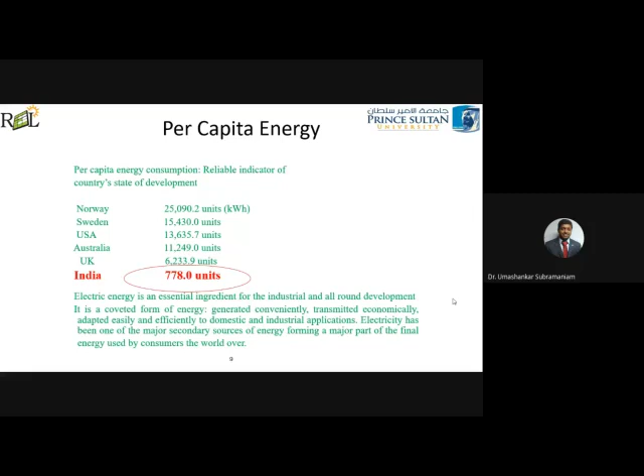Even recently one more incident happened, maybe in June or July. So the TNEB or any other energy industry, or the government, should be very, very alert to manage energy demands, especially to deliver energy without interruption to the entire community. So energy is more than an expense, it can be a liability.

What does it mean is the power cuts, you know very well. In India, just for maybe 5 minutes or a particular time period, we switch off, you know very well, during the corona, as well as there is one day we celebrate worldwide, a zero energy day like that. On that day also, they advise us to switch off all the things. If we do that, what happens? That is fine, maybe for a short time. So you just imagine about the power cuts.

Recently there was a cyclone in the USA, you know very well. The entire city was in dark, almost 24 hours, more than 24 hours. If this is the case, and another thing is in the Middle East countries, you know very well, there the temperature is quite high.

For example, we are facing here almost 40 to 50 degree temperature every day. This month only it started decreasing, but still it is 42 degree here. So this is the scenario. Most of the Middle East countries face like this.

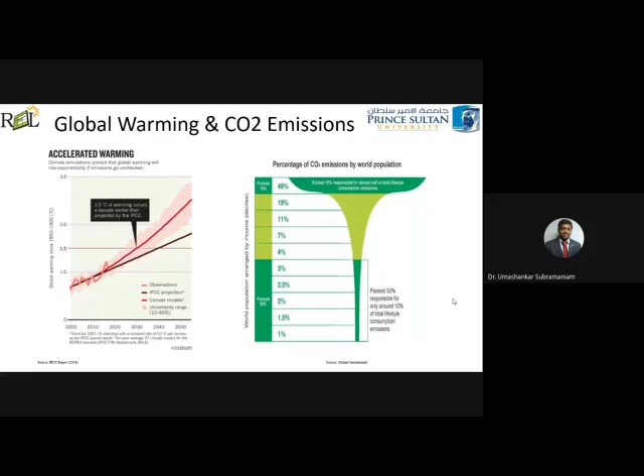Percentage of CO2 emission, if you look at the richest country as well as the poorest country, it is less - only the emissions are very less. For example, 3% in the poorest country. When you look at the developed, richest countries, the CO2 emission is huge.

So what are we supposed to do? As per the Schneider Electric formula, the world in the next 40 years would require far more energy, but in an ever more sustainable way - meaning how you can consume it using natural resources with more energy efficiency. In the next 40 years, what they predicted is energy consumption will be doubled, CO2 emission needs to be half, otherwise we will be in danger. For that, we should become 4 times more energy efficient.

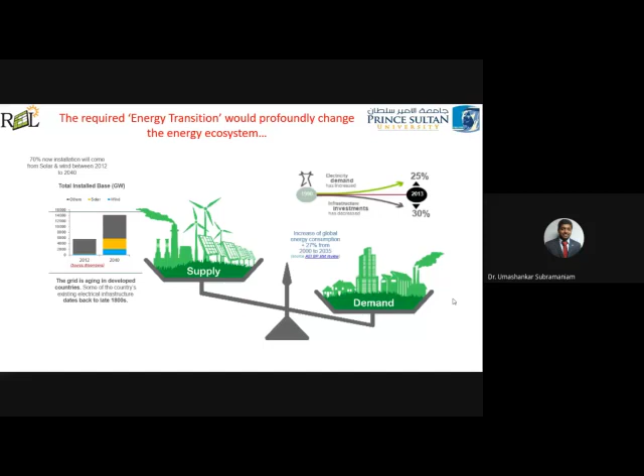Then the second thing is green building. Nowadays we need to focus on green building because it is part of the smart grid as well as smart cities. The building is a citizen of the city and has an obligation to society, so it should provide very good economic and environmental performance.

Who's that? Anita ma'am, can you mute? Excuse me, can you please mute that? One minute sir. Prasanna, unmute your mic. Prasanna sir, excuse me. Thank you sir. Sorry for the disturbance.

Anyway, this kind of entertainment in between is nice, only to alert the audience. So what we need to consider is the unique cultural needs, health, safety and productivity of its occupants, and with continuous care, the building has to minimize energy use.

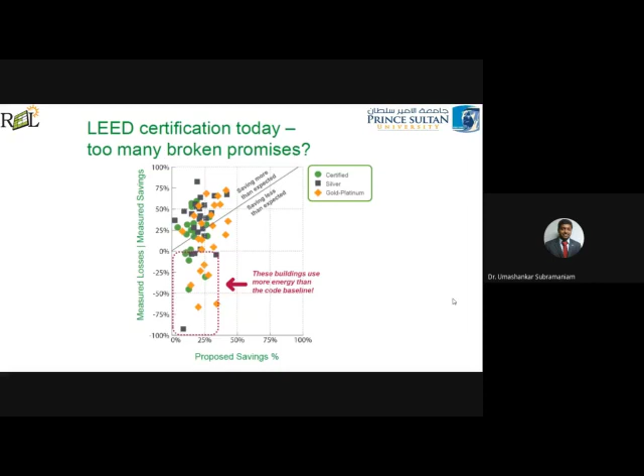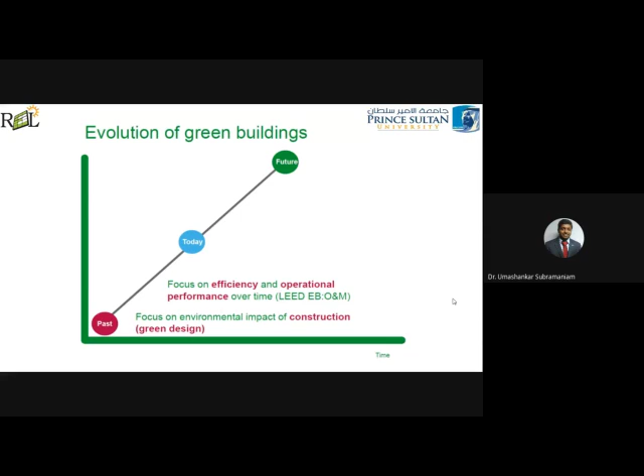Later on they implemented a star rating for different electrical equipment. You might be knowing about ACs, refrigerators, washing machines, all electronic equipment. Now they are giving a star rating stating that the energy consumption is very less.

So what is the advantage of going with equipment whose energy consumption is very less? You know very well, right? Recently during COVID-19, especially in the Chennai region, TNEB implemented a scheme saying no need to pay electricity bills from March. Later on they clubbed the fees, and many consumers received huge billing. So if this is the scenario, you should have some high star rated electrical equipment in your house. That is also very important.

Not only that, nowadays you have smartphones available with you, and smartphones are coming with IoT technology. So you can have IoT based smart home energy management using Android apps. Nowadays it's available from most companies, they are providing it. Even the fans are coming with this IoT technology nowadays.

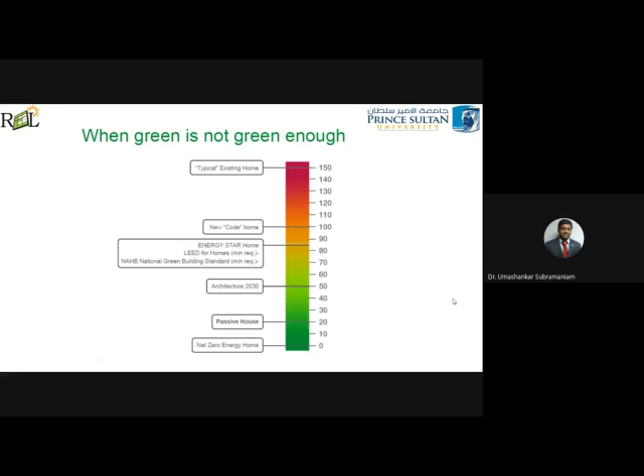Especially nowadays, rainwater harvesting is also one important aspect in this green energy building. They have mandated rainwater harvesting in Chennai especially, so that your particular house or land itself will get the necessary water required for your own use. That could also be incorporated or mandated so that they can certify it.

So if this is the scenario, we need to focus on smart buildings towards the smart grid as well as the smart cities plan. Even if you look at Chennai, there is a lot of planning, like arrangements for incorporating the energy storage option at every street or even every location. So the Tamil Nadu Electricity Board is planning now, and this planning is going on as of now.

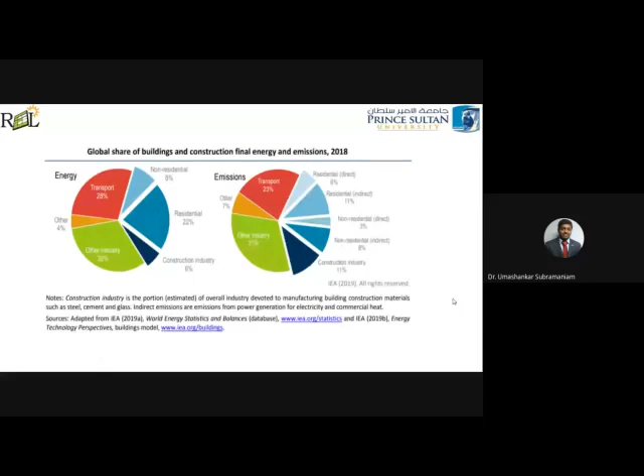So what could be a smart energy building? How should a building be looking like? The building should have natural habitats, the building should have the grid, the building should have its own energy generation like solar PV on the rooftop. The building should focus on the people and the neighborhood. You should be concentrating on the weather condition in that building or area. Then better transportation. So these are the aspects you need to consider.

So for all these cases, now we are depending on technologies. Technology is playing a very important role. So focus on the performance. What are the focus areas? One is utilization of renewables. Second is low energy systems. Third is passive energy saving technologies.

You can see the renewable energy resources like water source heat pump, photovoltaic power, CCHP, solar thermal power. This comes under renewable energy resources. Whereas if you look at low energy systems, it includes heat recycling, high efficient cooling as well as heating, because India is a country where the weather is always warm.

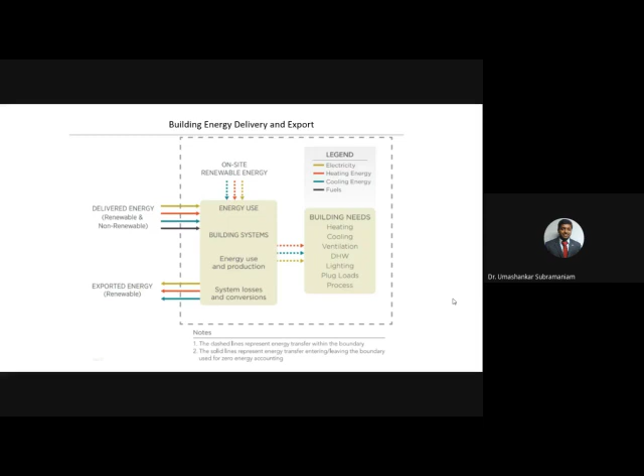The next one is a zero energy building. So we discussed smart homes, smart grids, and now the zero energy building. Zero energy building is a concept where the energy is generated in the same building and consumed in the same building, and sometimes the energy could be delivered to the grid also.

So the scenario is as little energy consumption as possible, cool in summer, warm in winter, with more efficient use of energy, for example heating, cooling, ventilation, lighting, and hot water. All those things we should do more efficiently. That's the reason they are suggesting star ratings now.

I told you already, right? If you visit T Nagar, there's a shop, I think it's a Ratna store, that always advertises with this star rating. They are very old stores in T Nagar, and they advertise this too.

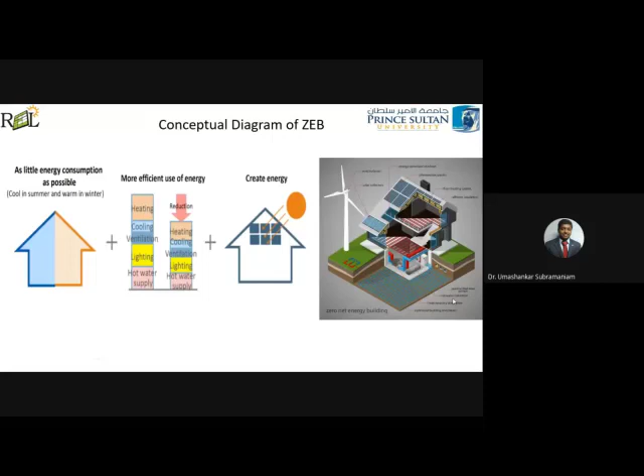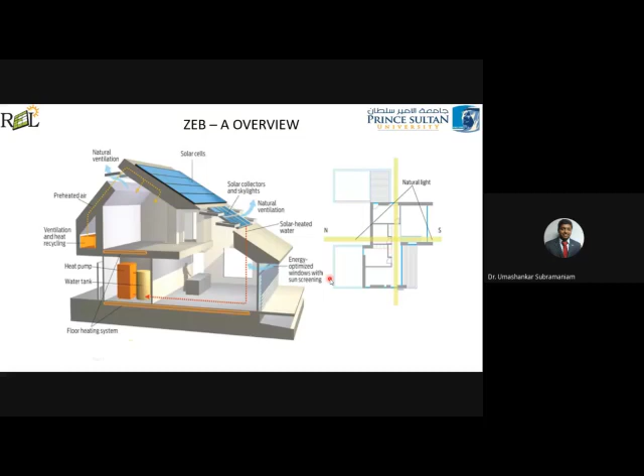Then DC homes. You know very well IIT Madras has incorporated this DC grid, not only inside their campus but in the nearby buildings too, I think the area might be near OMR Road, or Madhya Kailash, something like that, I forgot the exact location.

In that nearby area, they started providing DC supply for lighting arrangements to every home from IIT Madras. So this is the concept, it's nothing but making the homes more DC grid enabled in the near future, rather than AC grid.

Even the manufacturing sectors will change in the near future. In the olden days they used DC, then they converted to AC, now they will go back to DC.

Even look at railways, every coach in the train has a different electrical specification, the light or fan inside, and even the air conditioning system in the air conditioned coach, or if you look at Shatabdi trains, these are the aspects they are focusing on.

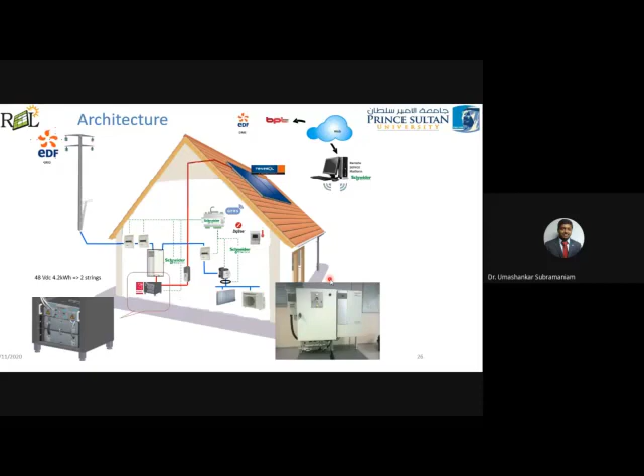Another thing is your smart grid should interact with each home, using its own sensing equipment inside the house as well as its communication technology. Okay, so this is the scenario.

So how will you operate it? In the near future, Chennai people will be given an Android app, and TNEB will ask you to decide your electricity bill. From 9 to 10, this is the bill; 10 to 11, this is the bill. So if you don't want it, you switch off your incoming power supply. They will give you this option in the near future.

So who knows? This is the technology evolution that is happening.

Another thing is, most of the time inside the house, we need to focus on how effectively we can manage the load, monitor and manage the temperature, and overall manage efficient homes using mobile interface, web interface, and home display. For all these things we need some inputs, like sensor inputs.

Another important thing is how we can manage it - not only monitoring but also control. This is the smart home energy management system. Many students are doing projects on this; we even did one in 2001, and we still do it now. When we did it, we used dial-up connection phones - dial 1, dial 2, dial 3. Now technology has changed; it's just one touch.

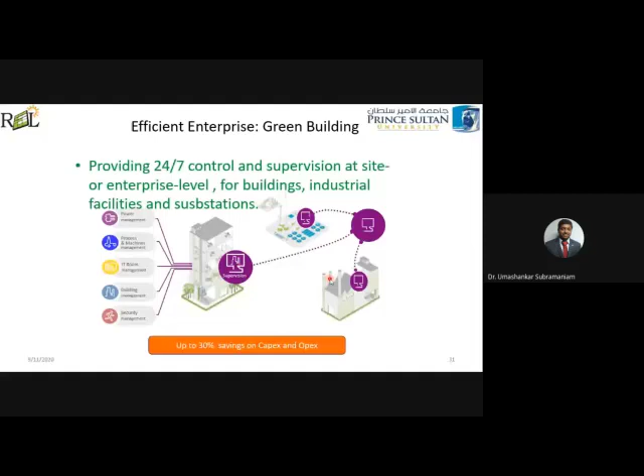So the ultimate aim in this is up to 30% savings on the capital expenditure as well as the operational expenditure.

Not only that, in the near future you need to connect your EV. EV is getting much attention. Recently there's hot news coming from India - every state has incorporated its own EV policy. So many companies are now focusing on EV charging infrastructure. There's one company doing the Chennai Metro development, and the same company is now focusing on EV charging in Chennai.

So just imagine, in the future homes, real estate builders have to focus on these aspects in the near future. Not only car parking - the car parking should have EV charging, and not only EV charging, it should have safe charging. Safety is very important.

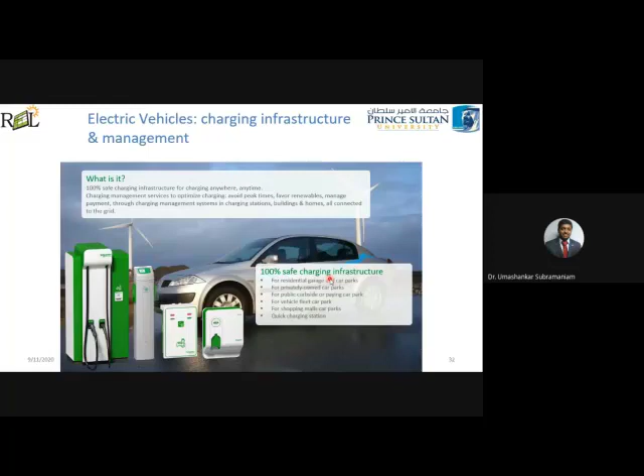On the western side, they are now focusing on wireless charging. You know Samsung has come out with wireless charging for smartphones nowadays. So in the near future, cars will also come with smart wireless charging - you won't require any wire. You just park, and under the charging plate, your car will automatically be charging. This is what will happen in the near future.

Now we discussed the past. What is today? There are certain things like smart and green coming together - now they call it bright green buildings, with the use of BIM and IPD and renewable energy. In the near future, you need to connect your electric vehicles, and you have to make your building net zero energy.

Net zero energy means generate your own electricity and consume it. Then carbon neutral buildings is the future. Please note down carbon neutral building - that means it has no carbon emission, no CO2 emission inside your building. Now we are talking about 3-star, 4-star rating, but in the near future it is 100% star rating, meaning no emission at all. And microgrids, then eco districts, eco cities - these are the near future.

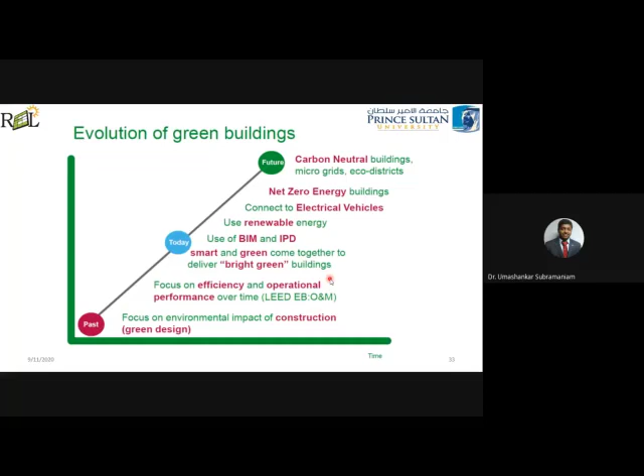So to achieve this futuristic technology, we need the help of cutting edge technologies like IoT, AI, big data, etc. Now I connect how this future grid or future building relates to the sustainable development goals. Goal 7 is clean and affordable energy, and 11 is sustainable and green practices for better living in the cities. Then goal 12 is recycling, reusing and waste management. Urgent call to stop climate change is under 13, and under 15 it is protect the forest and biodiversity by tree plantation.

So now I am relating all these things with the zero energy building - that means your smart home, which will focus on the smart grid as well as the smart cities.

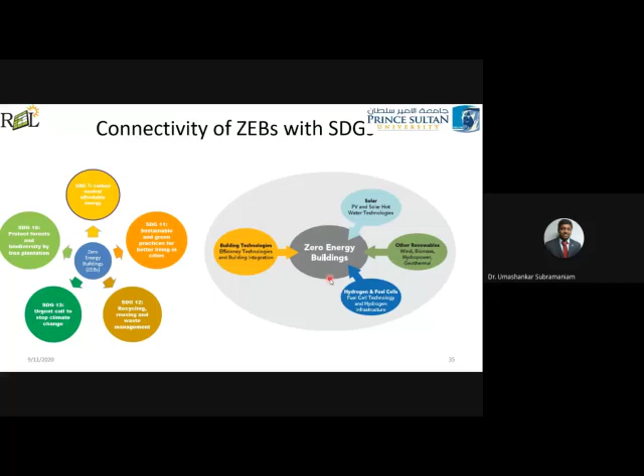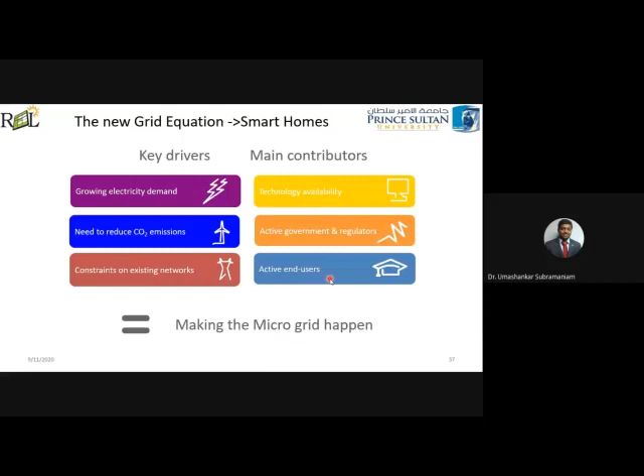Now, what are the key drivers for this? Very, very important. The key drivers are the smart grid or the smart homes, involving growing electricity demand, the need to reduce CO2 emission, constraints on existing networks, and our main focus is on technology availability and active government and regulators. Not only the government and regulators, but also the end users like us. This will make the microgrid or the smart grid happen in the near future.

For all these things, we need communication and software at all levels to provide the smart grid. So these technologies are so-called cutting-edge technology - it has to interact with all levels, like generation, distribution, and the consumer. Now it is very much effective, so you can have two-way grids, not only one-way grid.

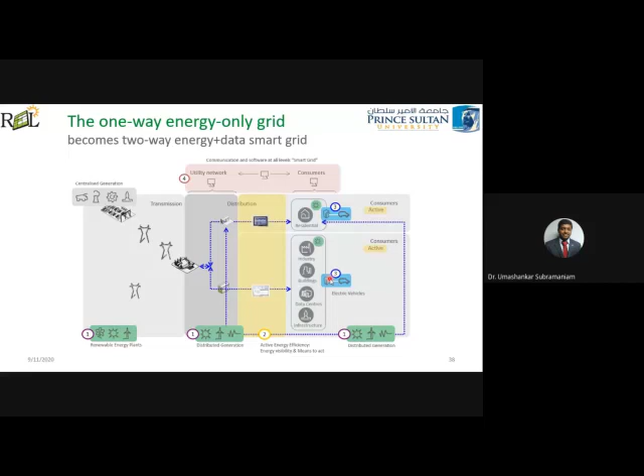So this is the case - like energy producers, you should have the government and regulator overall, they will monitor all these things. Then energy producer, transmission system operator, they focus on the generation side. And the distribution side - distribution network operator, energy supplier, energy traders - they focus there. Then on the consumer side, we have to make the consumer an active end user, and we have to make commercial buildings have a facility manager. Now you can see there are a lot of positions available in software companies or buildings, like facility manager, so they have to manage their facility.

Then we can have local energy producers as well, like solar, rooftop solar, or small wind turbines in your building itself. So these are all the things. Now, if you look at how you can manage the future grid, it's by providing technology and communication, networking, data management, IT enterprise.

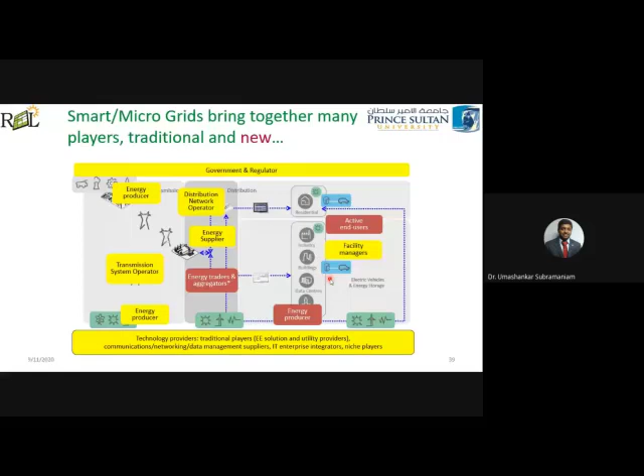That's the reason you look at now - if some students are getting placements and joining companies like CTS, you can see this kind of designation roles. Why? Because they are also focusing on this, doing business in this domain. CTS - don't think they are only doing software development. No, they are now into smart grid, IoT, AI - they are doing many businesses also, to help make smart grid happen. So what do we need to do?

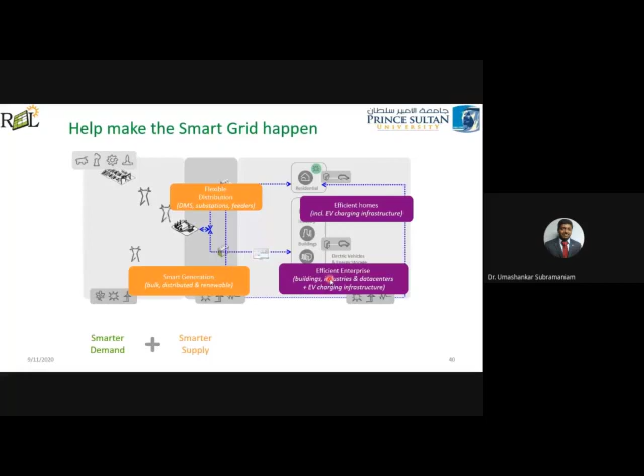Our role is efficient homes and efficient enterprise, like efficient buildings, with EV charging infrastructure, smart building, and smart data center. So you can make it a smart demand, not a normal or conventional demand, and make the distribution very flexible with localized generation in the distribution side, like solar. So smarter supply, plus demand response. Demand response is a word very much used nowadays in Western countries, and it will become very popular in India as well. If all three are in the right place, then the smart grid will happen. For this we need the cutting edge technologies we are focusing on today.